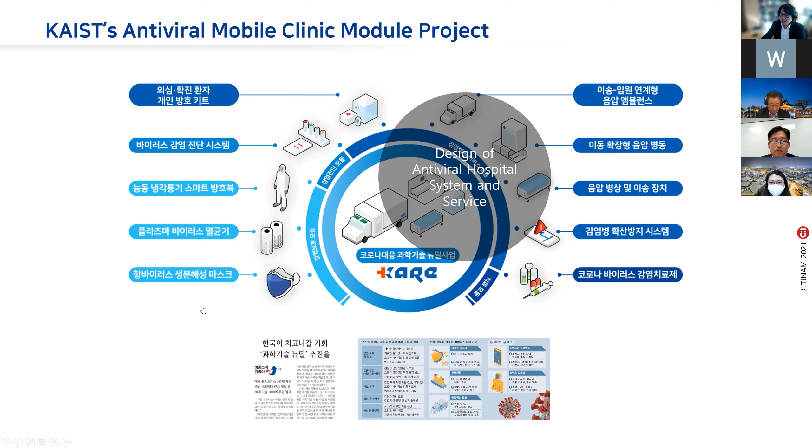So I was involved in planning this part. And what I started first was thinking about branding and what we want to do. I think this is a typical starting point for design experts to tackle this kind of big project. And then in a coordinated manner, we wanted to succeed in a big initiative driven by KAIST. So this was the starting point of my involvement in this project.

But at some point, I was interested in the big problems at that time, in early March last year. There was a big shortage of negative pressure isolation beds, especially for critically ill patients during the pandemic. At that point, Korea was managing quite well. We had a really big crisis at first in Daegu, because Italy and Korea were the biggest problems when COVID started.

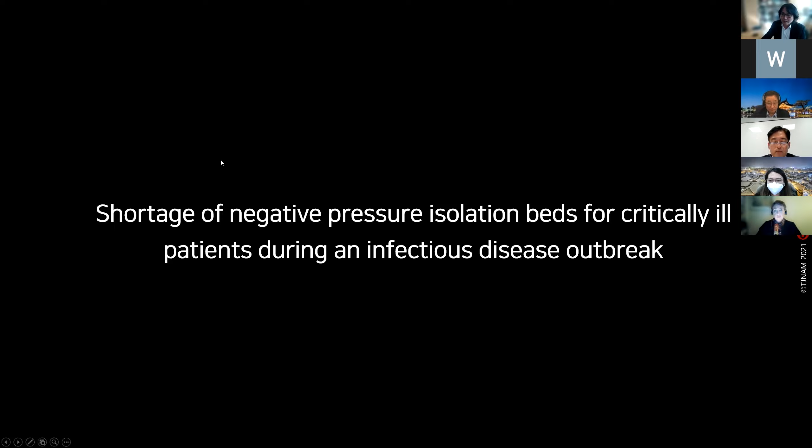But gradually, we launched a system called the Residential Treatment Center, where we quarantined the patients in a specific area, which is usually used for training purposes and so on. So that was fine. But we thought the most critical part was treating critically ill patients. So we saw these needs, and then we focused more on these negative pressure isolation beds.

In the beginning, because I was not really a domain expert, I started to learn this area and how to build these facilities more efficiently. And I found that the negative pressure isolation room is not a very complicated system. Basically, it is a space where air compression allows air in and air out, so that you always keep a certain area, usually where the patients live, in negative pressure.

And then you have to keep an anteroom so that the air doesn't come out directly, making a safe divide between the areas. The important thing here is management of infected air, water and other waste. But at the same time, there are medical activities going on, so it has to support them. And of course, the quarantine. We have to consider air control between these spaces, so we need an interlocking automatic door system so that the air doesn't come out directly.

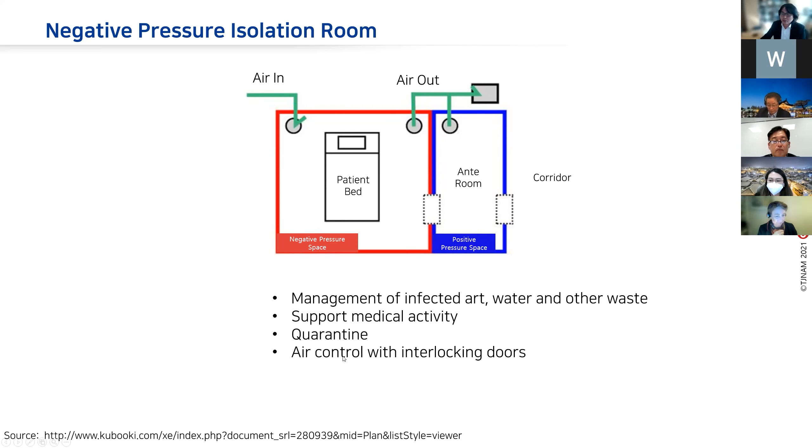So this negative pressure isolation bed on its own is not really complicated. But if it goes to the ward system, which you typically see in a hospital, it becomes a bit complicated, because if you have a multiple-patient room, and then there is a nurse station and medical staff going in and out, then every time they go in and out, there is waste, infected waste, and how to treat it. And some consideration has to be given to the path of the medical staff and patients, which has to be divided in case a very serious infectious disease happens.

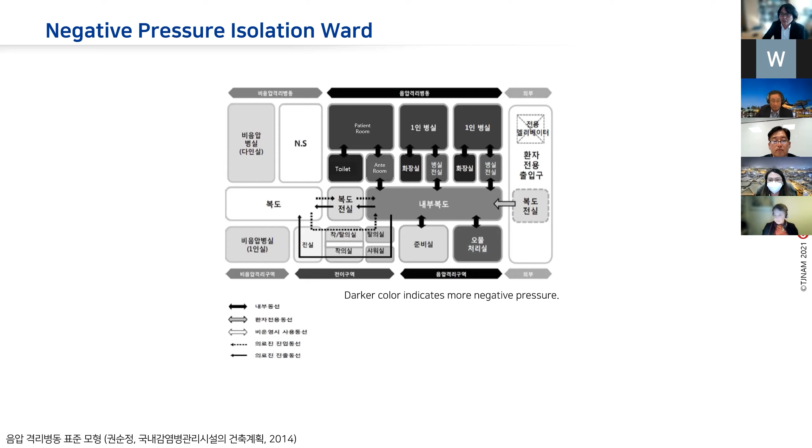So when we think about an isolation bed, it's rather simple, but if we want to compose it as more of a medical space, it's quite complicated. So far, these systems have been treated with more architectural solutions. For example, this was a hospital that was built in China last year. Within 10 days, they made 1,000 hospital beds for COVID patients using a modular architecture system. So they built this large complex hospital within a very short period of time. Often they use a gym and just put the beds there, so all the patients are treated in the same space.

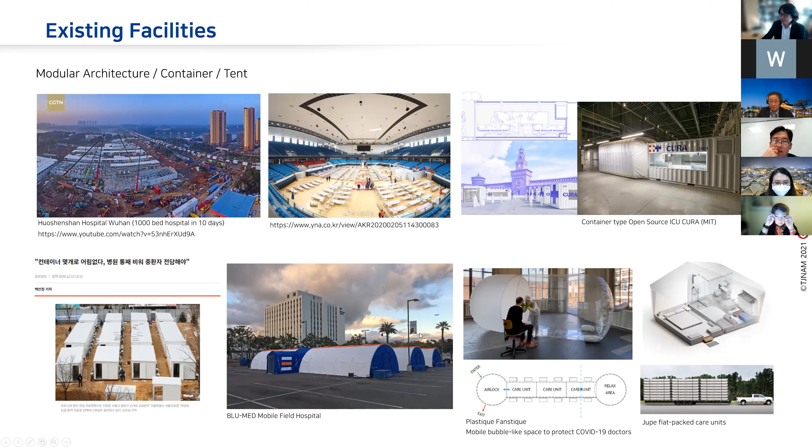Also, MIT introduced something called the Cura open source container-based quarantine system. And tenting is usually used in the military. But the problem is they mostly focus on quarantine purposes. So it's very difficult to consider a layout and coordinated path for actual medical activities, and very difficult to apply to diverse medical contexts. There are different needs in different phases of an outbreak. And also some ideas remain at the concept level, proposal level.

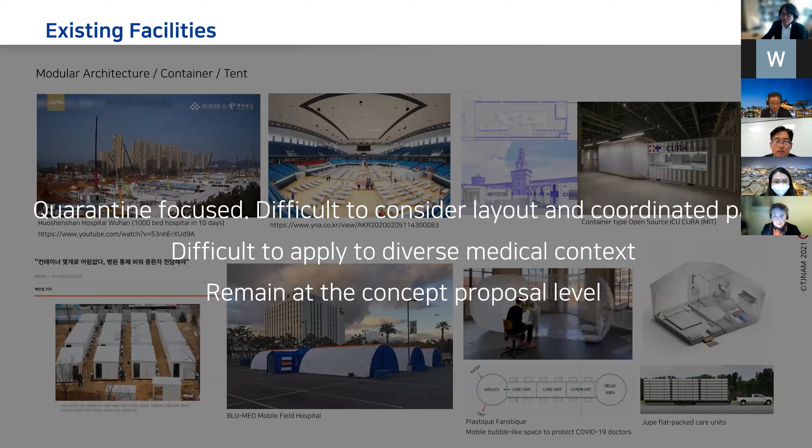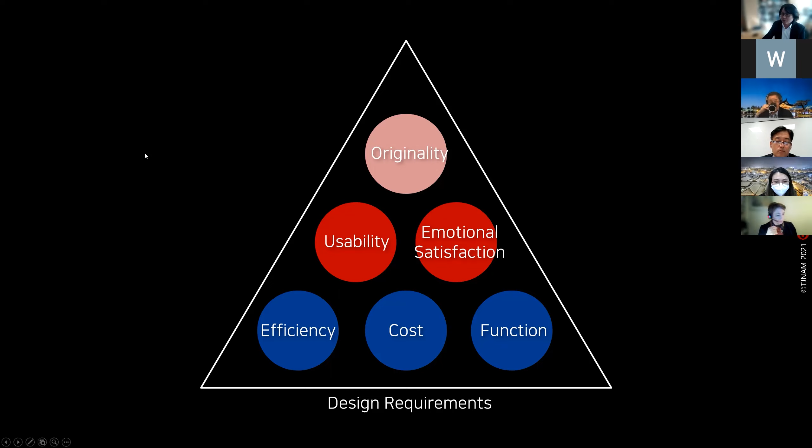So we came up with this KARE MCM and proposed this idea. One of the things we considered in the design phase was, of course, that function, cost, efficiency, the engineering requirements have to be met. At the same time, we thought that usability and emotional satisfaction are very important design criteria, and also originality. So basically the purpose of design is to balance all these conflicting requirements, so that the whole system is coordinated. So here is the concept video that we presented, which explains a lot of what we built.

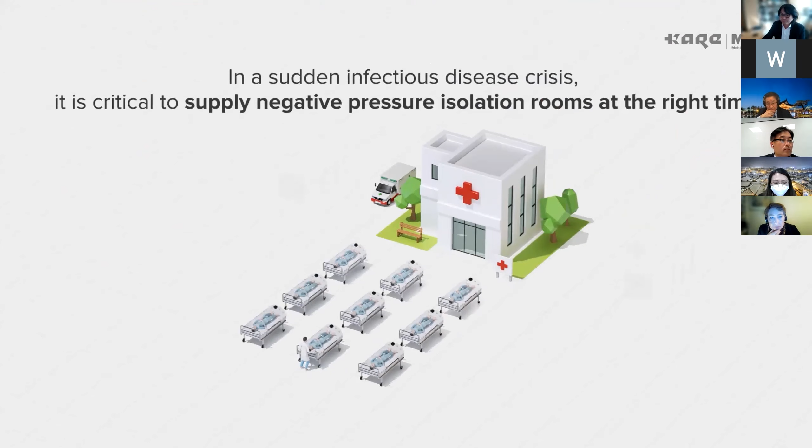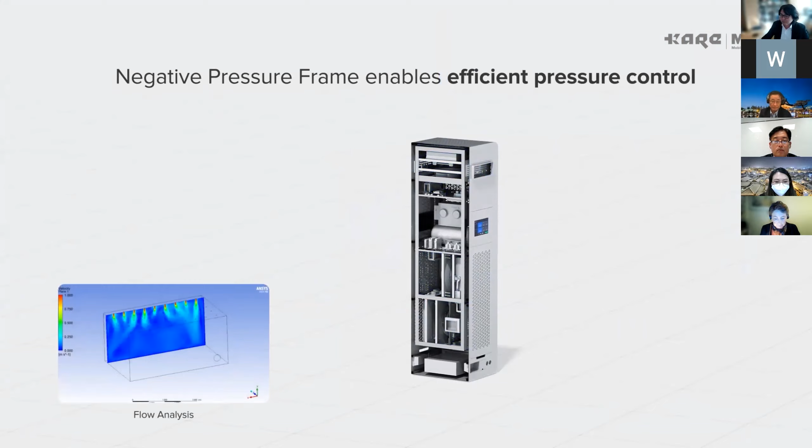In a sudden infectious disease crisis like COVID-19, it is critical to supply negative pressure isolation rooms at the appropriate time for patients and medical staff. KARE MCM is a mobile expandable negative pressure ward equipped with advanced medical facilities. With its rapid installation, it can supply a functional and economical medical facility. It also provides ease of use and emotional satisfaction to medical staff and patients. The main components of KARE MCM are frame, functional panel, and air tent. The most important component is the negative pressure frame. It circulates air through positive and negative pressure pumps inside. It allows individual adjustment of the air pressure in spaces on both sides.

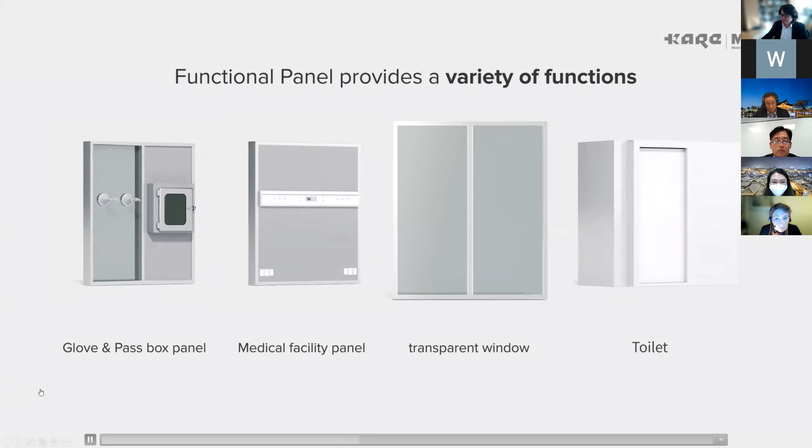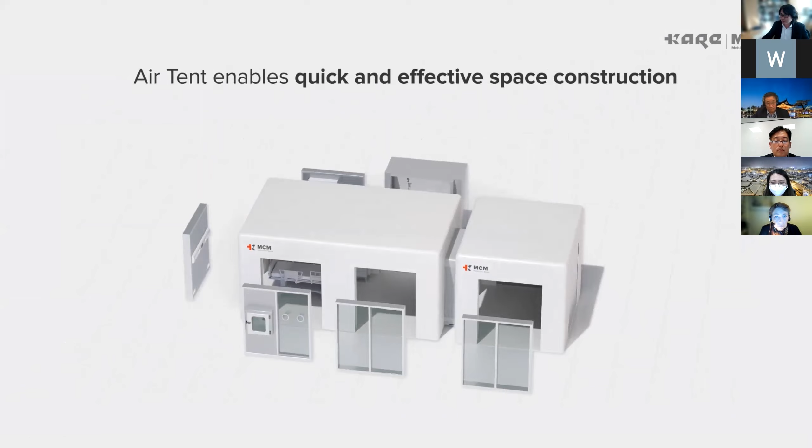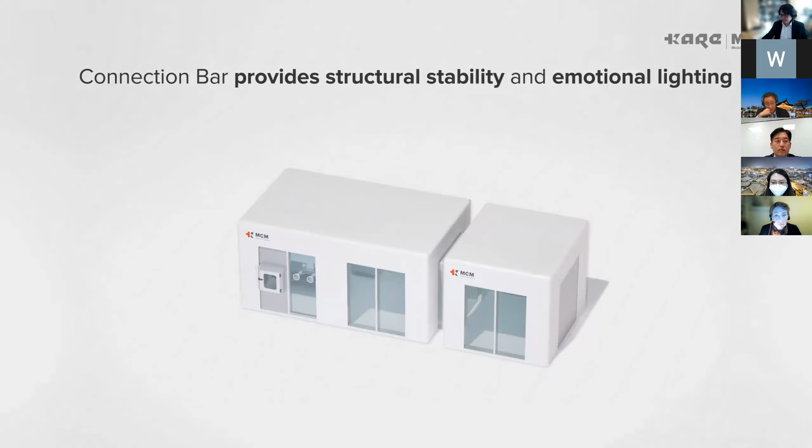Functional panels are wall components that provide a variety of functions. The glove and pass box panel allows medical staff to deliver objects or perform simple treatments to patients without wearing protective clothing. Medical facility panels are equipped with medical gas and device connection terminals. Other functional panels include the transparent window and toilet. The last component is the air tent. The inflated tent is harnessed by the frames and functional panels assembled in the square holes. The connection bar increases the stability of the assembly. It also works as indirect light. The user can freely adjust the color temperature and brightness of the light.

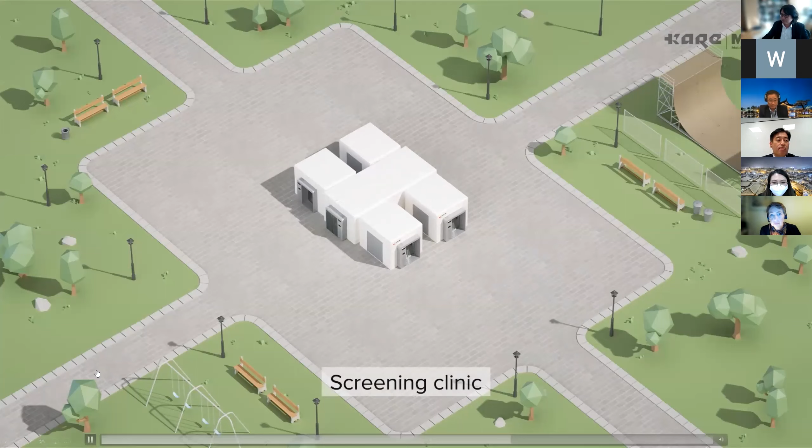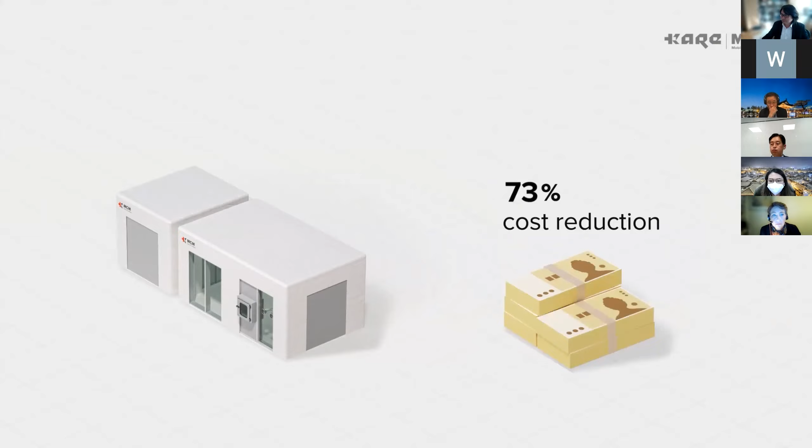KARE MCM can be used as a medical facility for various purposes. It can be assembled as a negative pressure ward for severely ill patients, a temporary isolation bed in the emergency room, a screening clinic, and so on. KARE MCM takes 15 minutes to install a basic unit consisting of an anteroom and a patient room. It can reduce the cost by about 73% compared to renovation of an existing hospital building. KARE MCM is easy to install, store, and transport. When compressed, it can reduce the volume to a tenth. The entire ward can be transported by air. Are you searching for an easy, rapid, and economical solution to safely treat patients in an infectious disease crisis? It's KARE MCM.

So the basic idea is, as I explained, the basic units are the anteroom and the patient's room. There is something called a negative pressure frame. And by assembling these frames and also the wall components, which are called panels, we can quickly compose this one building unit, the one hospital room unit.

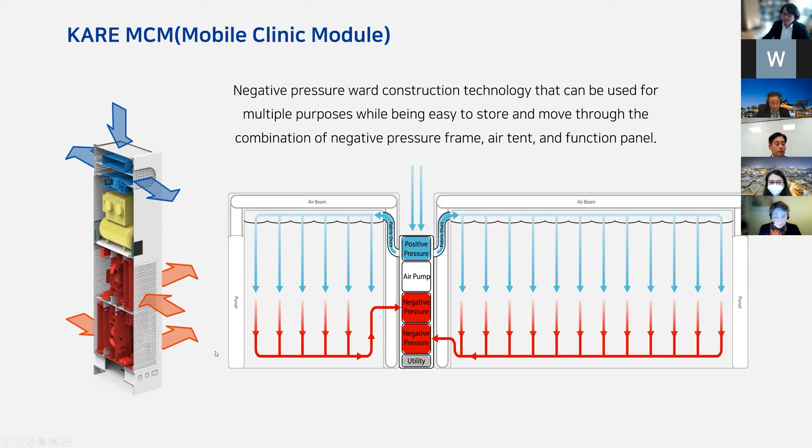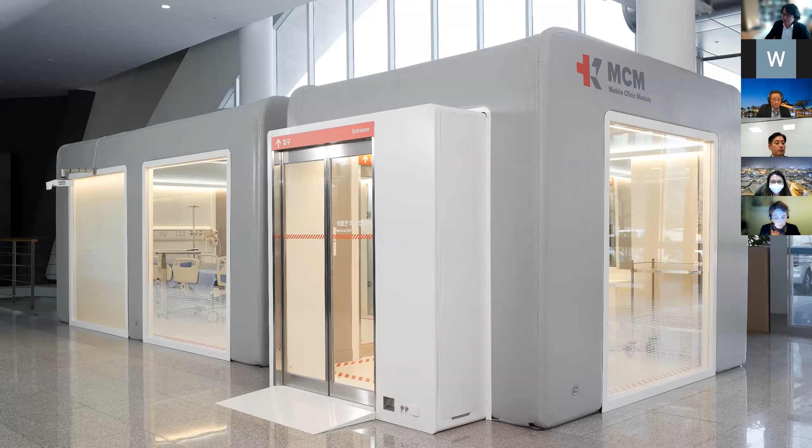We simulated the actual air flow in the room, so that it comes in from the outside, goes to the ceiling, then goes down, is sucked into the sidebar and then goes out. So initially we tested this fluid dynamic simulation for whether it works okay. And this is the design mockup that we first built, to see how it feels as a medical treatment space.

So as explained in the video, because we use the negative pressure or positive pressure difference, we had these control units, and on two sides there are pumps, and also we had this air pump to maintain the appropriate pressure in an air tent. So all these components are within one component, so that without much construction, it allows us to make this system mobile and easily assembled.

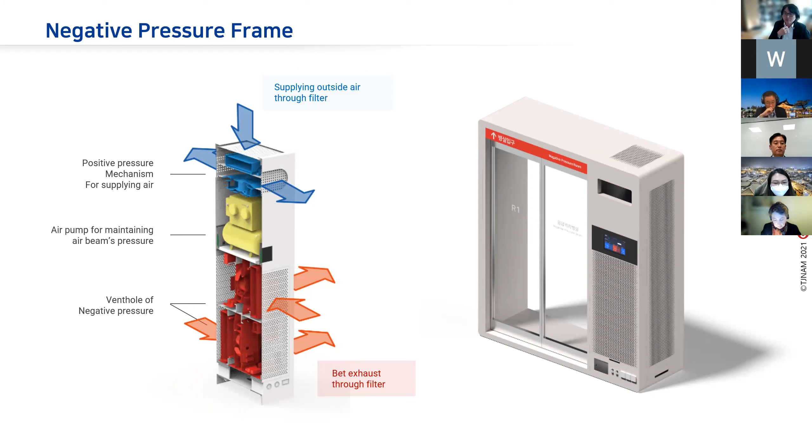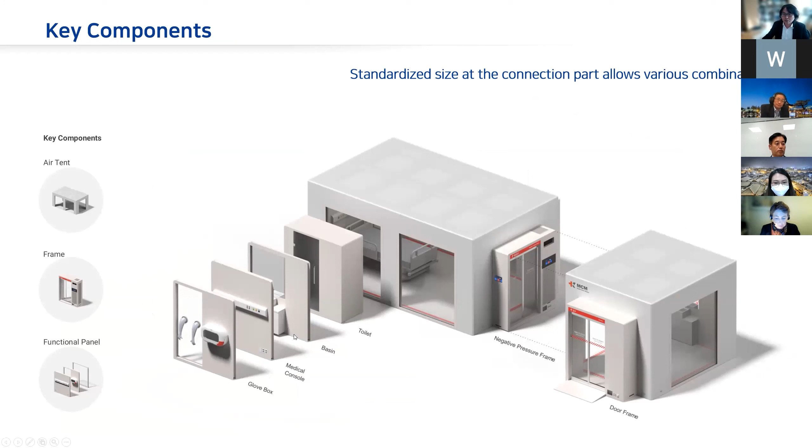So if I look at the components, there are air tent units and also the frames. There are negative pressure frames as well as this door frame, so that it can be connected, so that we can easily set the interconnections and so on. There are toilet units and also medical units and so on. By assembling these components, we can build many variations. At the same time, we had this inside light bar, so that it gives stability and also emotional lighting in the room.

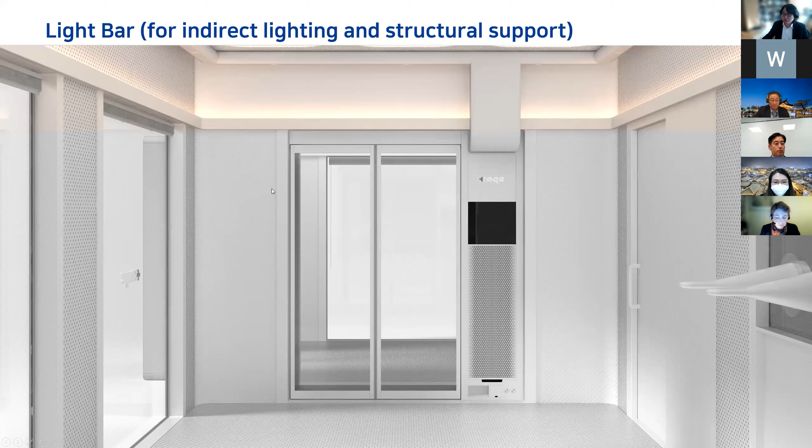Well, one of the things that we cared about in the beginning was how air flows. At the top, there are air holes, and depending on the pattern of the air holes, we found that there is more efficient air control and flow. So first we had even air holes in the ceiling, but later we had these refined air patterns, and we can see that the performance has increased in this way.

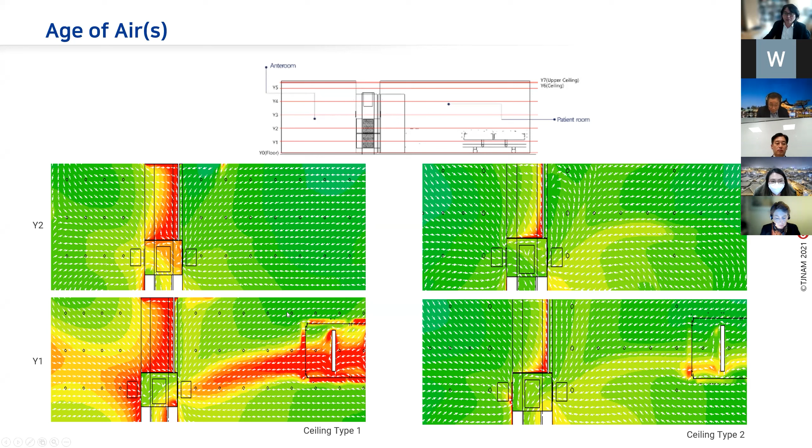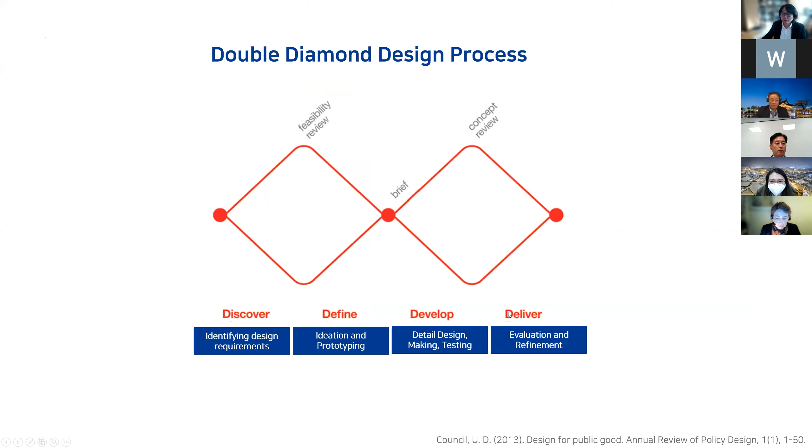So the design process that we usually use we call the open double diamond design process, with four phases: discover, define, develop, and deliver. We think about many different alternatives, then choose one, go into the detailed design and implement. But this project was much more agile. We actually started last year in August, and there was big time pressure. We had to deliver some meaningful outcome at the end of December. So we really went through all these phases in parallel.

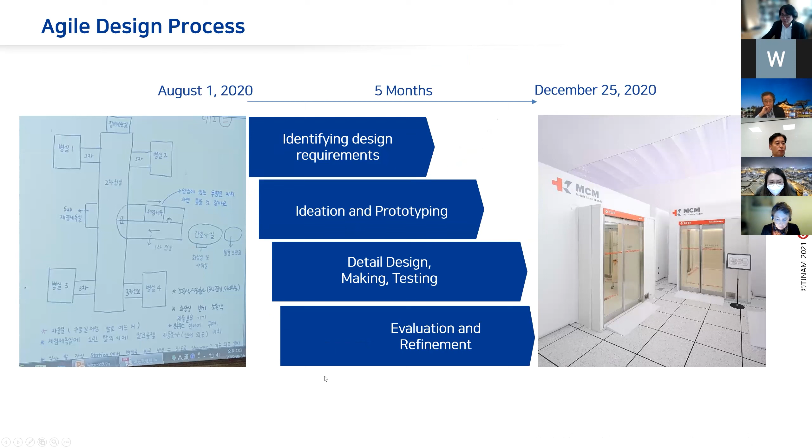So these are the early sketches that we collected from nurses, of what the nurses want in the space. And then we translated it into an actual prototype space in 5 months. We talked a lot with medical staff and the nurses and also the director. This medical doctor was very passionate. And I would say that this kind of user involvement in the design process is very essential and very critical. Otherwise, sometimes we just make what the technology can produce.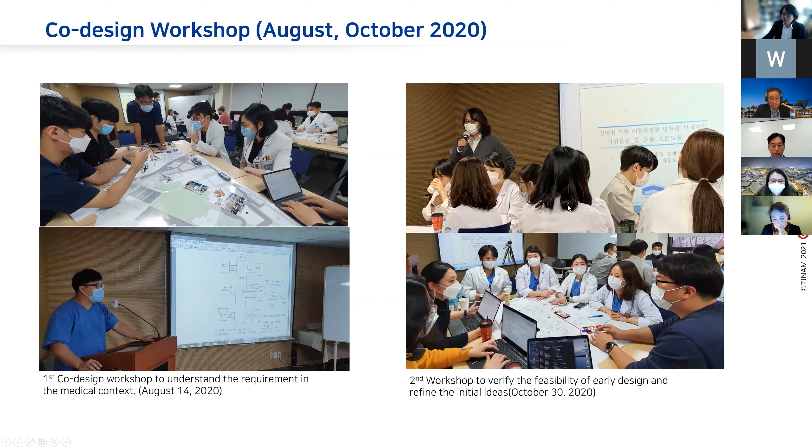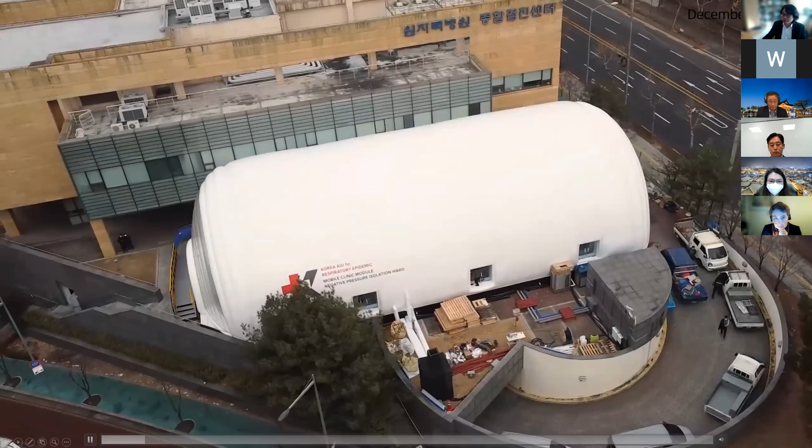We had 2 major workshops during the phase. At the same time, we made this first functional prototype just about 3 months later. Having this system, we saw the feasibility of this space and also the construction method and so on. Then later in December, we actually built the site in Seoul. So this is showing how this site was built. We had 2 sites, one in KAIST and one in Seoul, in a hospital.

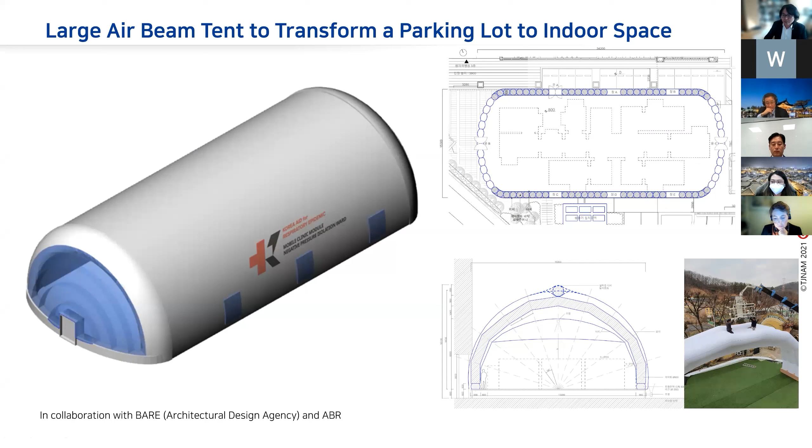So to build this site, in addition to the main components, we had to design additional parts such as the big tent unit to turn this outside parking lot into indoor space. So we also designed this experimental new air beam tent as a side part of the project. This is the assembled interior when it was built.

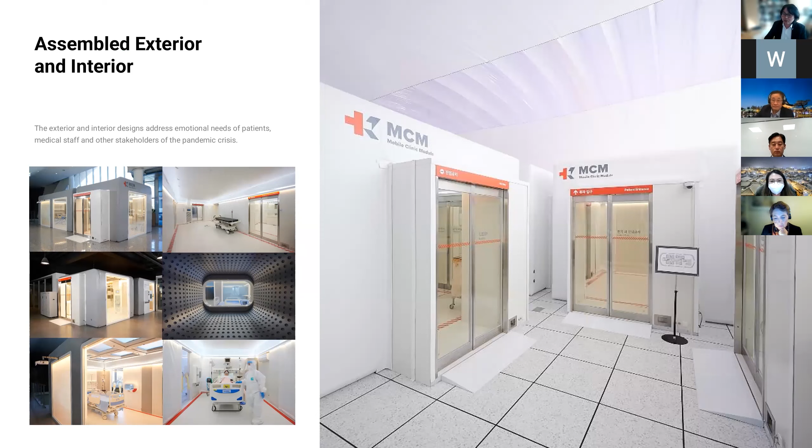We replicated or referenced the negative pressure ward in KCCH, which is the hospital where we built it. They already had a 4-bed ward for critically ill patients. And we simulated how the patients would be treated inside the space.

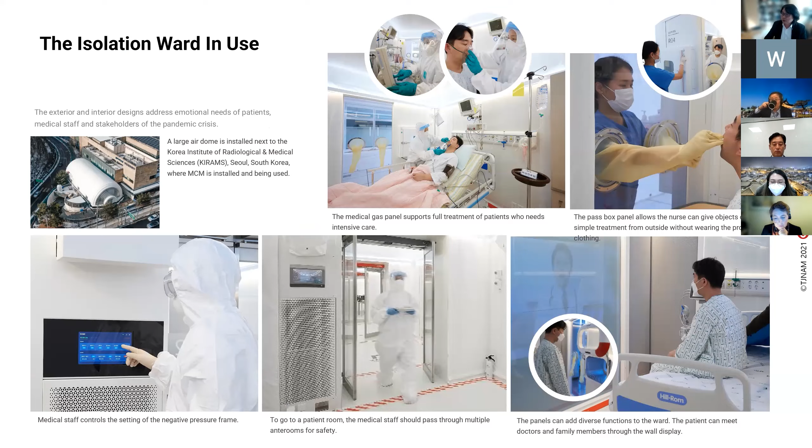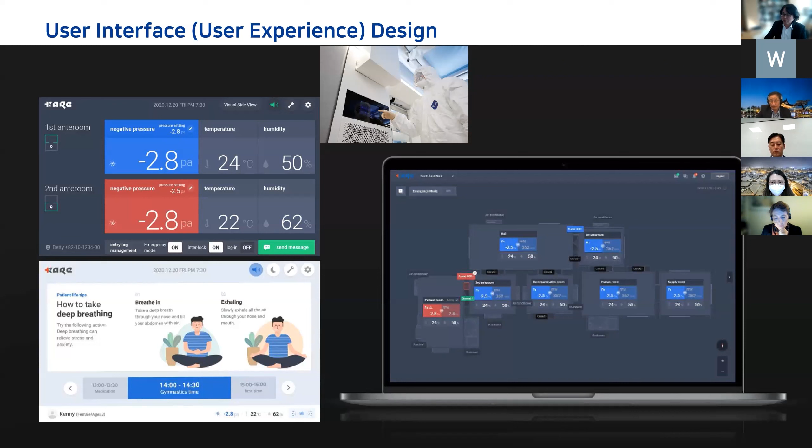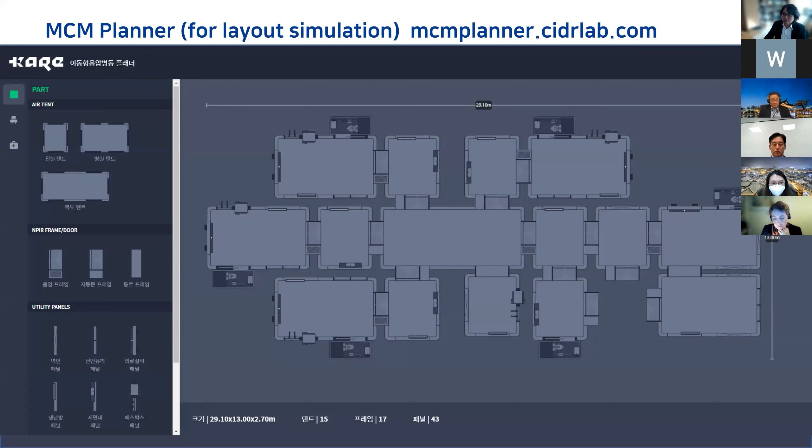We also focused on the usability of the system. Because this is a new kind of system, we redesigned all the digital user interface and all the monitoring and control systems. In addition, we thought it was necessary to simulate the plan layout of the system beforehand. Some sites have a different layout, different space available, so we made this layout software so that we can quickly assemble these components and see how it fits.

This was shown to the public in early January this year. At that time, hospital beds had almost run out in Seoul; there were only 3 available hospital beds for critically ill patients. So we were exposed quite widely in Korean and international media.

That triggered really fast patent issuing and also the technology transfer to the company that we work with for the early prototype development. We also got a certificate from the government as an innovative product.

Another thing that we are proud of is that we won very prestigious design awards, all 3 most prestigious design awards. In particular, we got 2 Best of the Best Design Awards from Red Dot in product design and user interface.

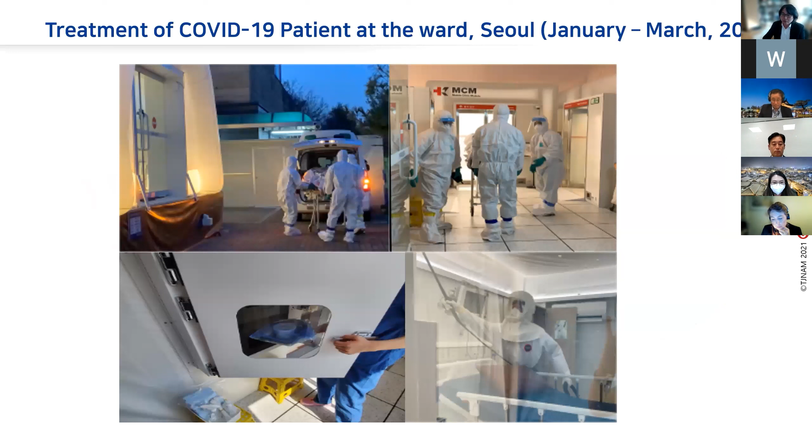After that, another big task was to see whether this is feasible in real clinical usage. From the first system that we built, which was more like a demonstration system, we went through the whole process of getting approval to use this space for medical purposes. Fortunately, we passed all these phases, and we had 2 COVID patients hospitalized and successfully treated in the space.

One piece of feedback from the medical staff was that the glass wall, glove box and pass box were very efficient because they don't have to wear protective clothes every time, which they usually always have to wear in the building, and then put into infected waste when they come out.

We also implemented this in a vaccination center in Jeju as a waiting bed, and it is still being used.

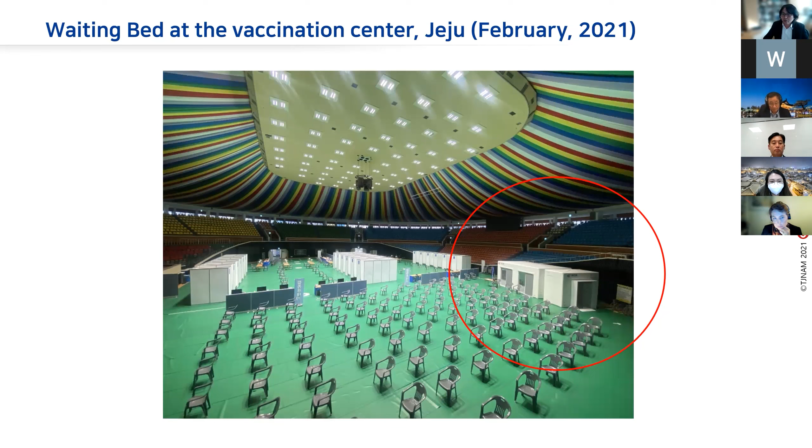They are still using it, and every day about 5 patients use this space. Not all the patients are COVID, but when they are suspicious, they go in here and get treated. So we are very happy that they are using it successfully.

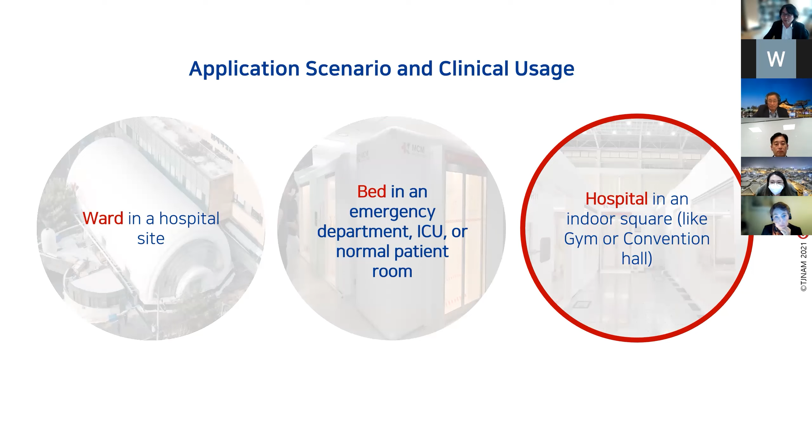The last big experiment, more like a clinical use test, was done last September together with Gyeonggi-do. One of the early ideas was: in a situation like Daegu, Italy or Wuhan last year, what if we could very quickly transform an indoor gymnasium into a COVID hospital? At that point we didn't need that, but how about building it more like a medical center and using it for a different purpose?

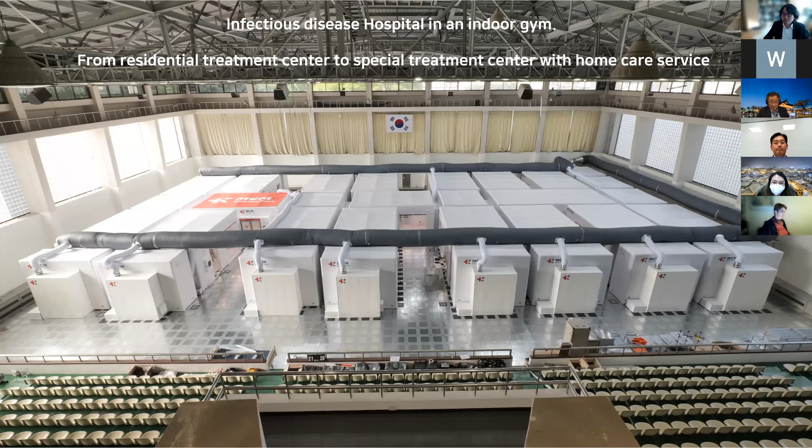So we thought about this as a home care unit service. Home care service can be combined with this system, in Korean 재택치료. So this was finally a transformed hospital; we call it a special treatment center. And this shows how it was built.

During the summer, we spent about 2 weeks of working hours, but we realized that within about a week we can transform this indoor gym space into a medical center with hospital functions. These are scenes we photographed before the patients came in. This is an X-ray center where we can take X-rays outside of the building.

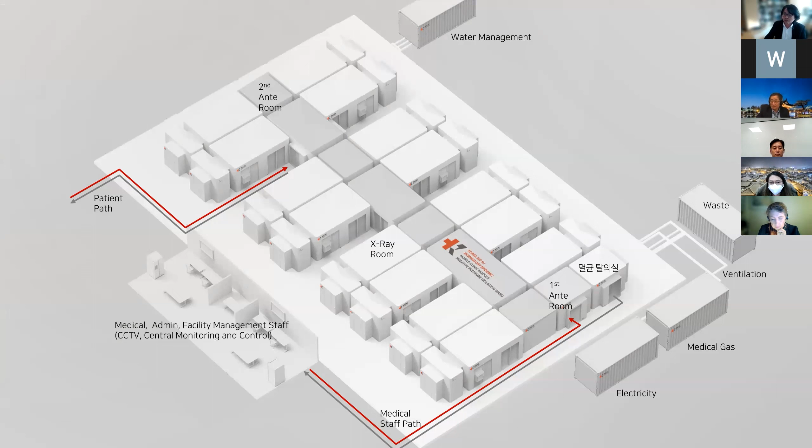You can see there are many corridors and space just outside the patient's room. This was the layout, and depending on the size of the space, we could coordinate the paths of the medical staff and patients and customize it without direct interaction with patients. But still, the medical staff can treat face-to-face without touching them.

We revised and customized the monitoring system and the control units, so that you can control and monitor the whole system: the pressure, status, temperature and humidity, and whether anything is wrong.

We operated this treatment center last September and October for a month. At that time, the COVID situation was a bit stabilized, and only Gyeonggi-do was very active in home care, so that COVID patients don't come to the hospital.

So we treated about 116 patients. Usually, if COVID patients are hospitalized, they spend about 10 days in a hospital or residential treatment center. But in this case, they usually stay at home. When they have some kind of symptoms, they come to a special treatment center and spend just 1 or 2 days. If they get better, they go back home. And if they get worse, they go to hospital.

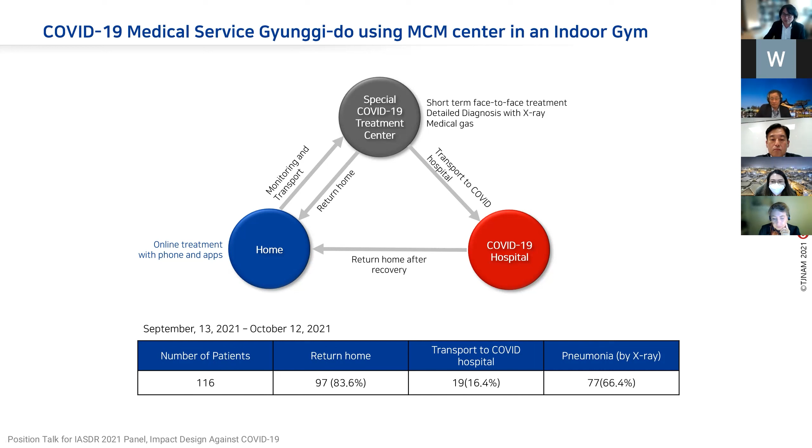So this is more like a buffer space that reduces a lot of medical workload in the actual hospital. In the very worst case, this treatment center can be used as an actual hospital too. In our testing, among 116, about 66% were diagnosed with pneumonia, but about 83% came back home safely, and only 16% went to hospital. So the medical experts said this proves that this is very effective.

We talked a lot with the director of Anseong Hospital, one of the Gyeonggi public hospitals. We worked a lot with these medical experts, and they also evaluated this as very effective and efficient. One of the things they liked was that this system minimized medical resources in terms of the number of admin and medical staff, but also maximized the patients' treatment. We also had very positive feedback from patients; they were really satisfied and thought this was much better than they expected.

So to reflect on what we've done, at the time we made these slides, we were facing the fourth peak of COVID. In the early outbreak, we had to build new residential treatment centers or COVID hospitals, and top-level hospitals had to have special beds for critically ill patients. So two separate medical systems had to be provided for the public, which gave a lot of burden to public health and government.

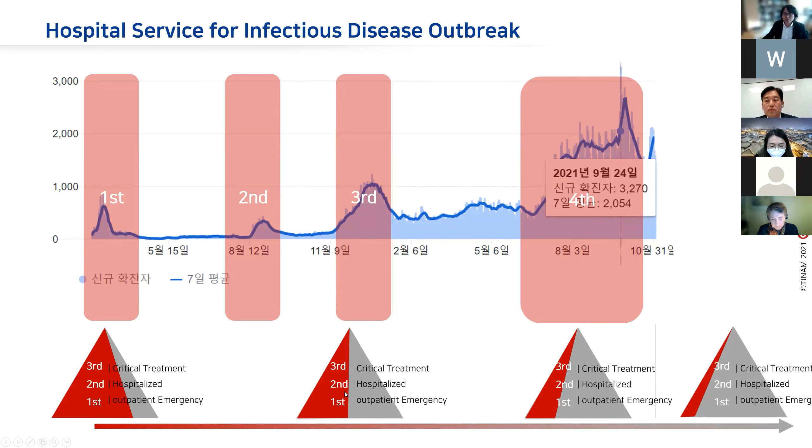Gradually, as we knew a little more about COVID, these merged together, and now a lot of COVID patients stay at home, and we only use facilities when they are critically ill and there are essential needs for treatment. But I thought an alternative is that whenever we come across a new infectious disease outbreak, we have to be ready in all these medical facilities and organizations to respond to the immediate outbreak, and gradually, depending on the situation over time, it would be nice to have a very flexible response to infectious disease.

So what I think we can do with KARE MCM: we actually tested the ward function and bed function in Konyang Hospital and Gyeonggi-do, and we also tested it as an emergency bed and a hospital special treatment center. This means KARE MCM can perhaps assist these medical services throughout the life cycle of an infectious disease outbreak. In the future, we are thinking of modifying and reusing some of the facilities in the Gyeonggi-do area into an outpatient clinic system, which is planned for next year.

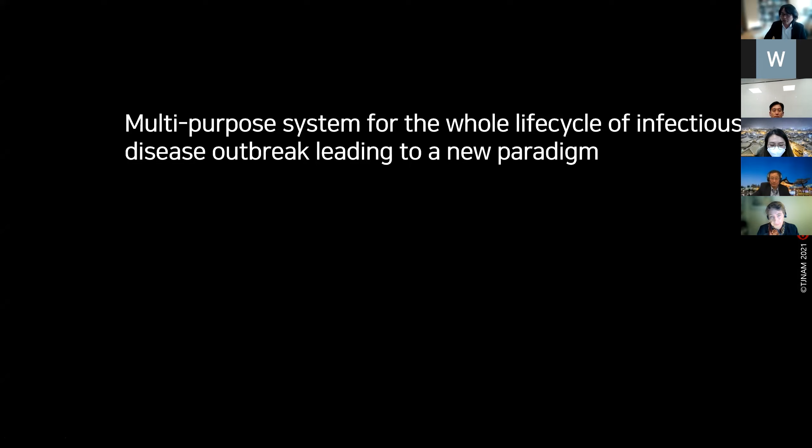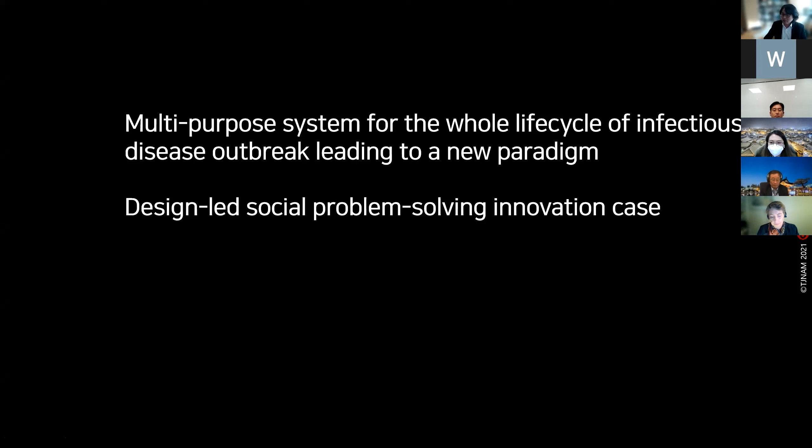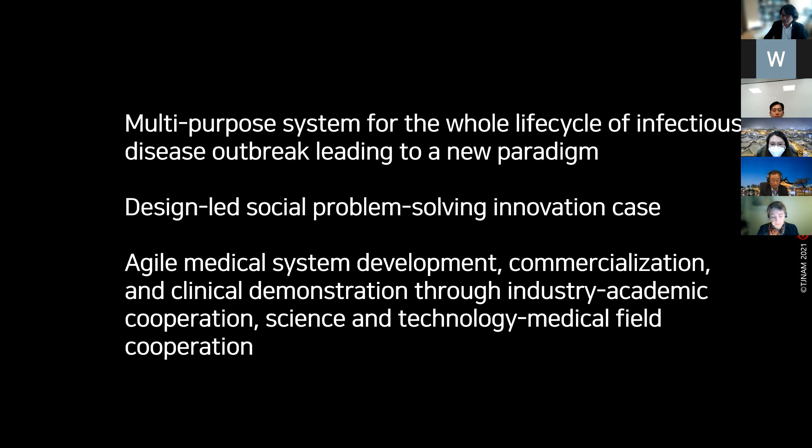So to conclude, I introduced a multi-purpose system for the whole life cycle of an infectious disease outbreak. Perhaps it could lead to a new paradigm to treat infectious disease. As a design expert in the industrial design department, I'm very glad this could be a showcase of design-led social problem solving innovation. Finally, there are a lot of behind-the-scenes stories about how we did this agile medical system development together with commercial companies and many different research parties. Within the design domain, I also worked a lot with other design experts, so we could possibly show different models of agile development. So that will conclude my talk.